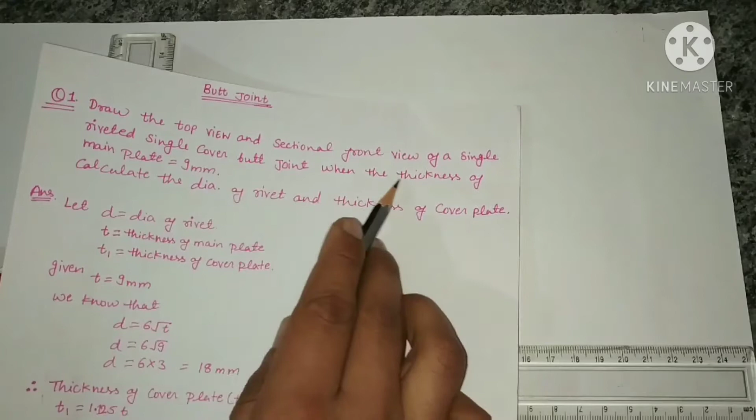This particular drawing is related to butt joint. So we are going to solve the first problem on butt joint and fourth problem in the rivets. The question is: draw the top view and sectional front view of a single riveted single cover butt joint when the thickness of the main plate is 9 mm. Calculate the diameter of the rivet and thickness of the cover plate.

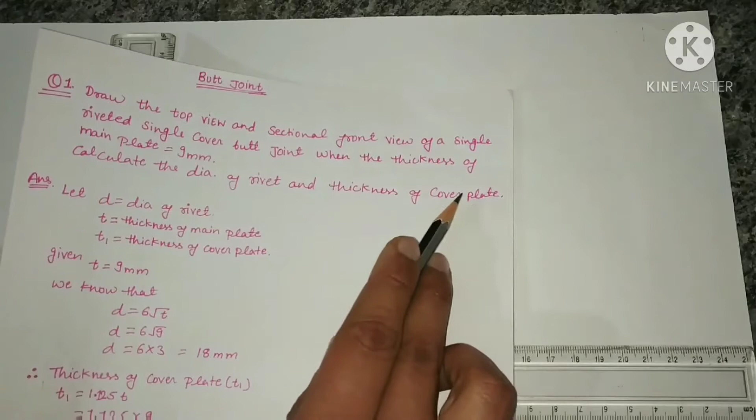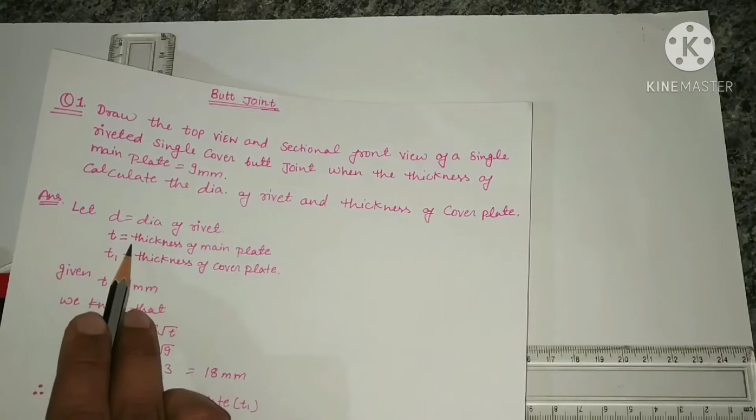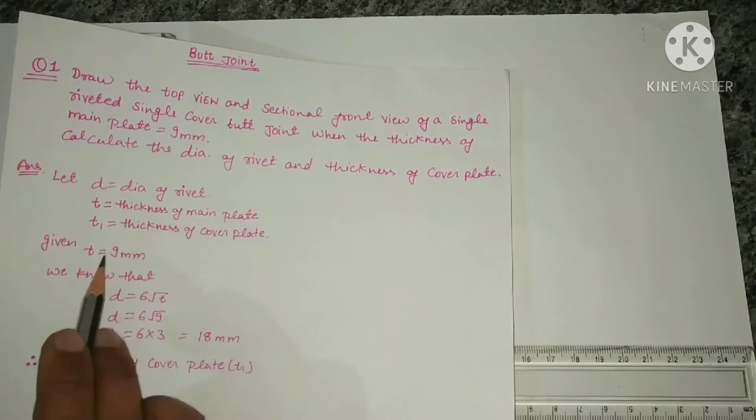So here thickness of the main plate is given as 9 mm. We have to calculate the diameter of the rivet as well as thickness of the cover plate. So let us consider D is equal to diameter of the rivet, t is the thickness of the main plate and t1 is the thickness of the cover plate. Given value is thickness of the main plate, that is small t, given as 9 mm.

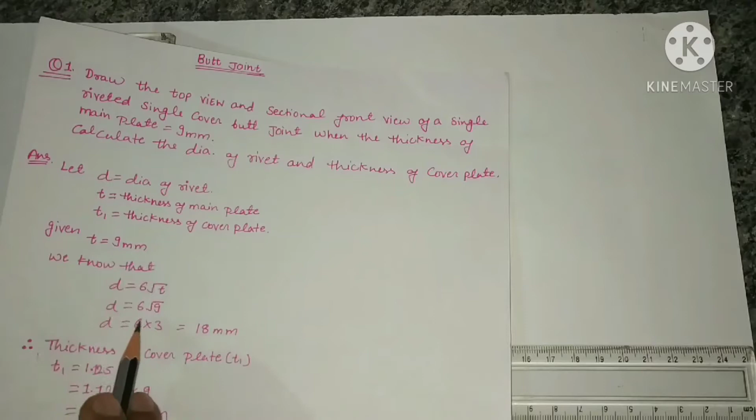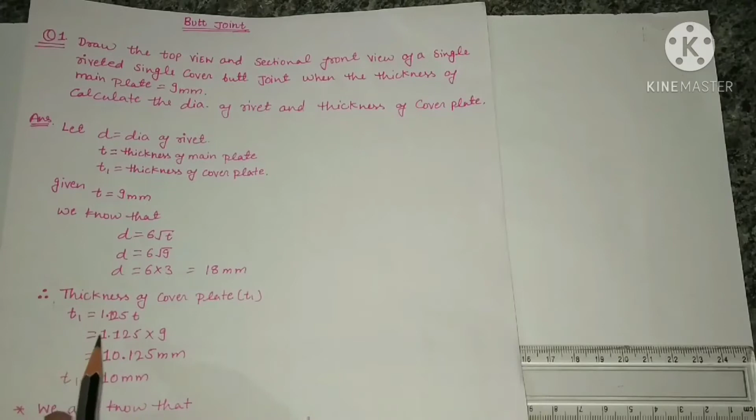Now from the formula D is equal to 6 root t, substitute the value of t as 9. Then root 9 is 3, 6 3s are 18. So diameter of the rivet is 18 mm. Now next step is to calculate the thickness of the cover plate. t1, the thickness of the cover plate, is equal to 1.125 into thickness of the main plate. So 1.125 into 9 mm. It will give you the value of 10.125 mm. You can round it off to 10 mm.

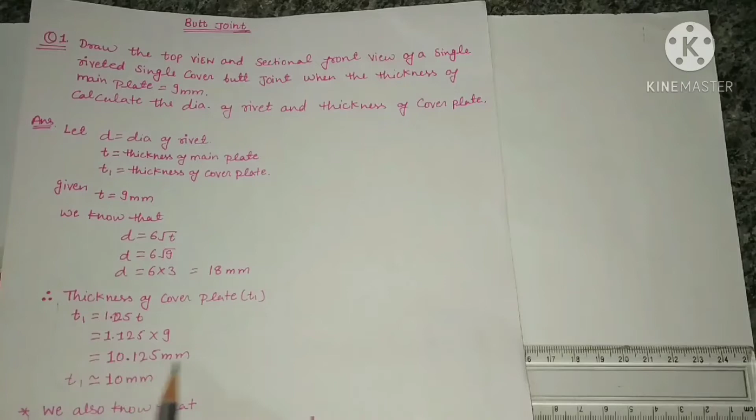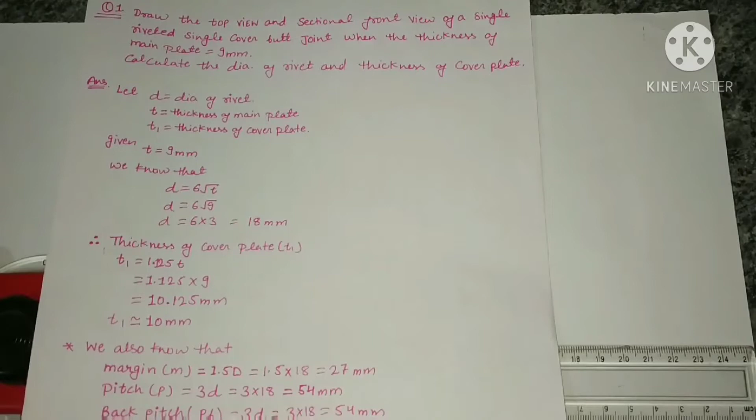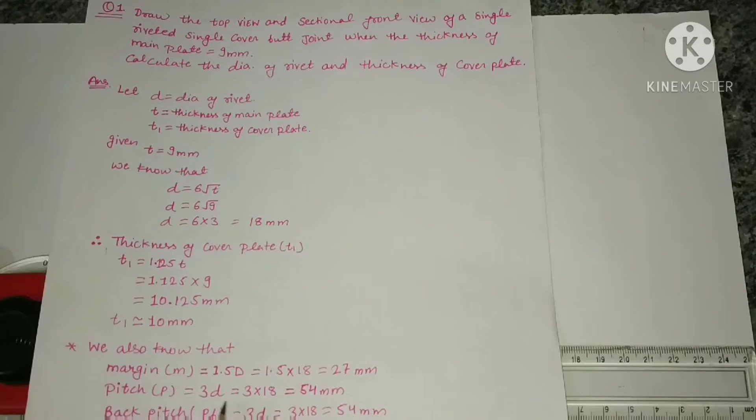Also we know the formula for calculating margin. Margin is nothing but the distance between the center of the rivet to the end of the plate, that is to the slant end. Margin is calculated by 1.5 times of diameter. So 1.5 into rivet diameter 18 gives margin around 27 mm. Now calculate the pitch value, that is 3D. 3 times of diameter is equal to 54 mm. Also calculate the back pitch. Back pitch is calculated by 3 times of diameter. Again it will be equal to 54 mm because diameter is 18 mm.

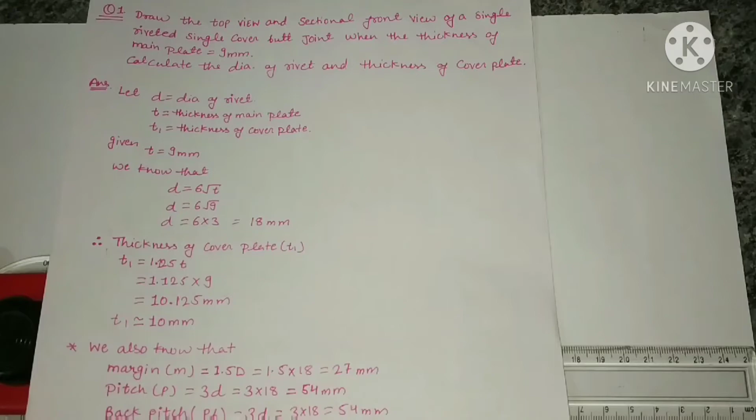You are going to keep the plates side by side and place the cover plate. If you are having one cover plate, place it on the top. If you are having two cover plates, one cover plate on the top and one on the bottom of the main plates. And you are going to apply the rivets. Here single riveted butt joint means you should have one rivet for each main plate. So for a single riveted butt joint, you have to consider two rivets. You are going to join two plates in the form of butt joint by using a single cover plate. So let us see how to draw this.

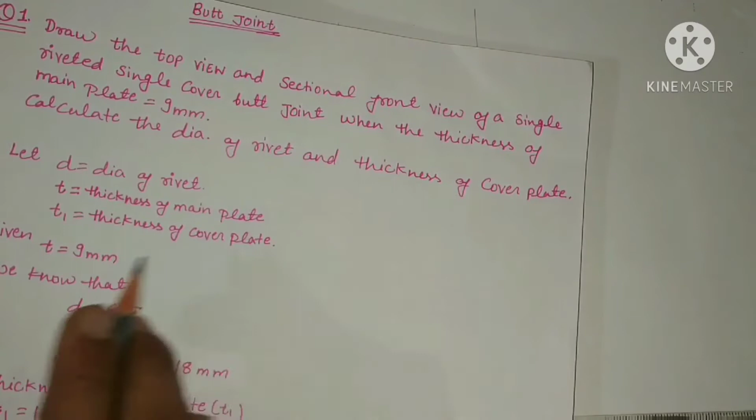As similar to the previous cases, draw the center vertical dash line or chain line. Now we know that it is a butt joint, so obviously we are going to draw two rivets. Even though it is a single cover plate butt joint, to create that butt joint you need two rivets. So we are considering two rivets. First of all, consider the diameter of the rivet, thickness of the main plate and thickness of the cover plate to construct the front view.

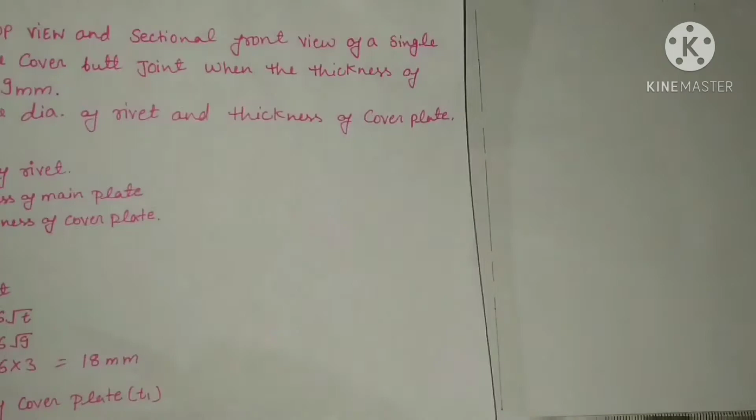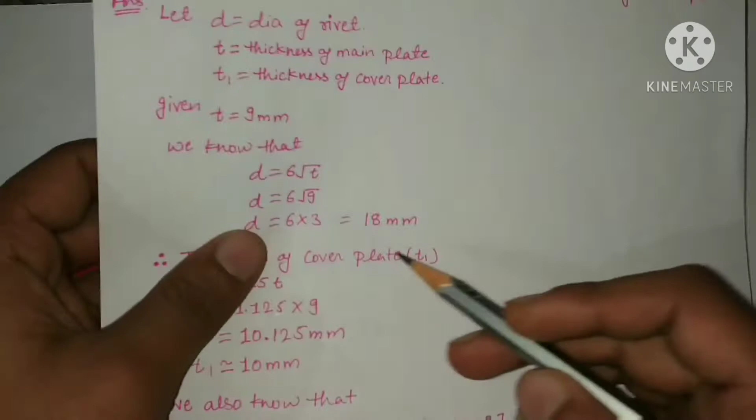As a first step, construct the body or shank of the rivet. We know the diameter of the rivet, that is 18 mm, 1.8 centimeter. Considering this value, draw the body of the rivet. Here length of the rivet will be around 19 mm because thickness of the main plate is 9 plus thickness of the cover plate is 10. So the length of the rivet body is 19 mm and diameter is 18 mm. So 19 cross 18, you have to construct the rectangle by considering a center vertical line. This will give you the body of the rivet.

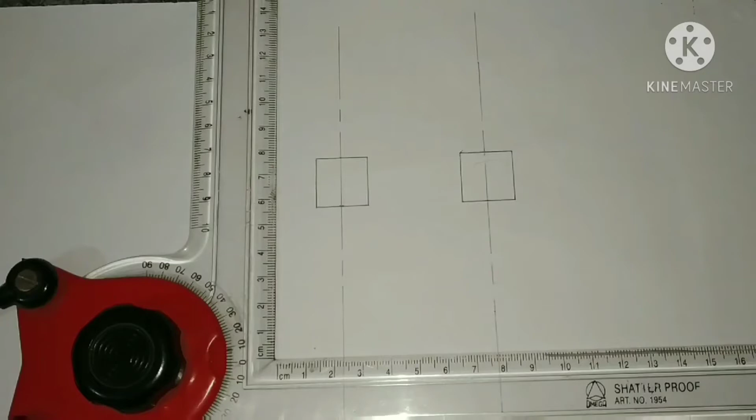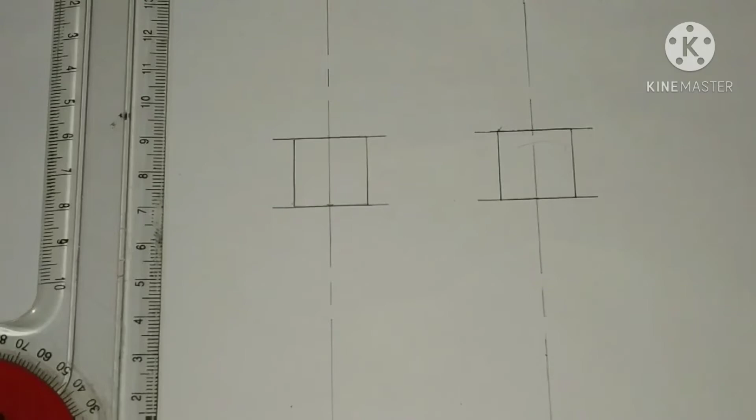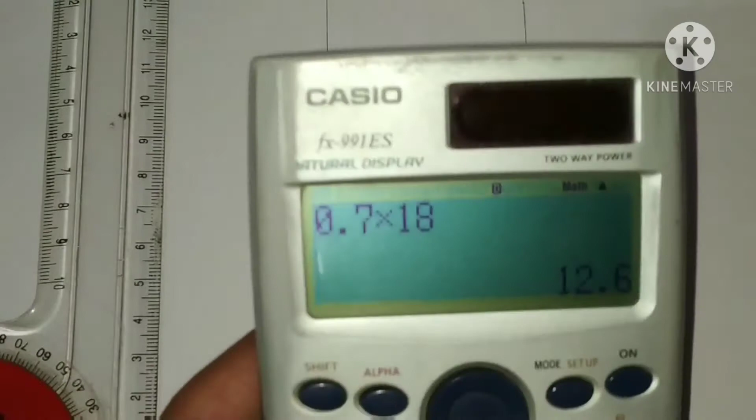After completing the body of the rivet, the next step is to draw the head of the rivet. To draw the head, you have to consider 1.6 times of diameter. 1.6 into 18 is 29, and 0.7 into diameter, that is 13 mm. So by using these two, draw a rectangle on top of the body of the rivet. Then by considering a point on the vertical line, you can draw the semicircle which will give you the head part of the rivet.

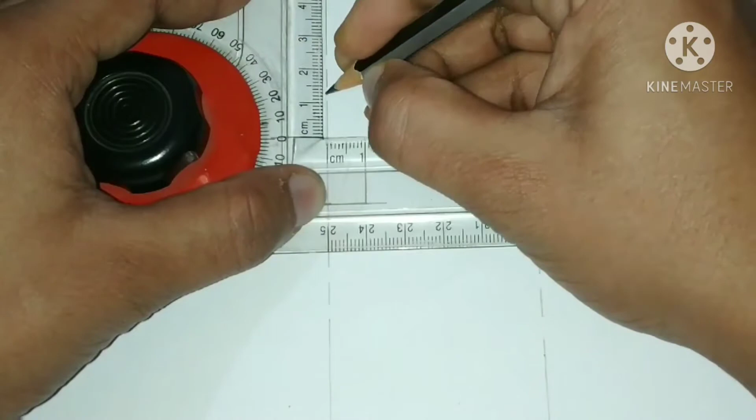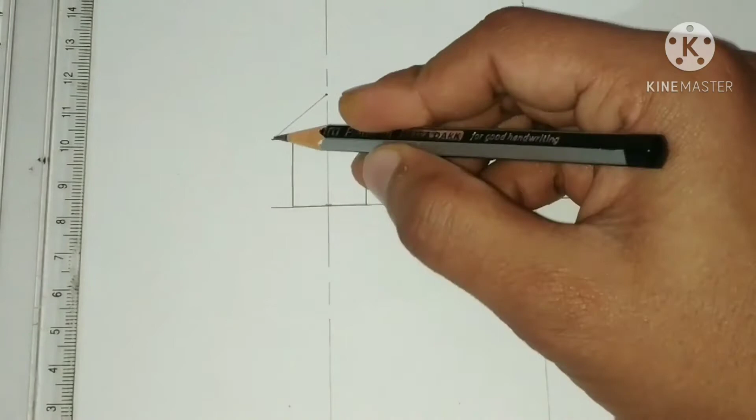Or else the second method is to consider the width, that is 1.6 times of diameter. Draw a line which represents the width of the rectangle. Considering this as base, using arc method, draw the head of the rivet. Same thing has to be applied for both the rivets. Draw the rivet heads on both the sides.

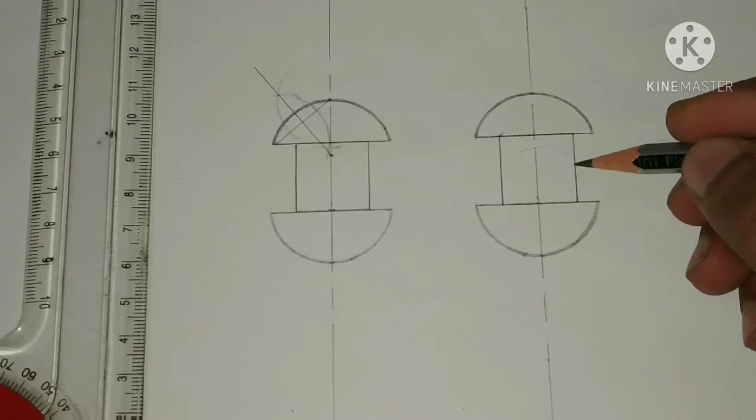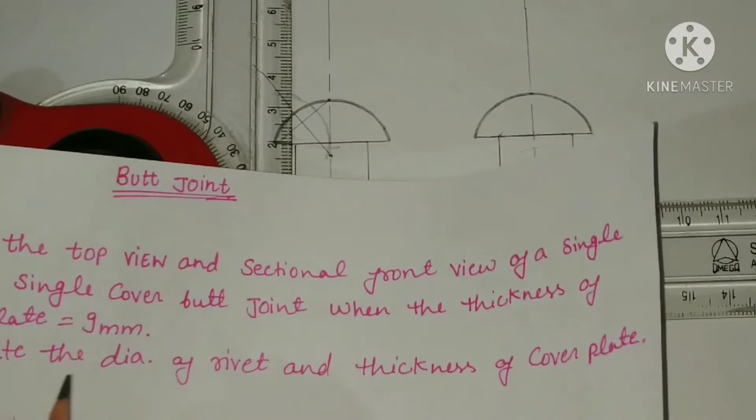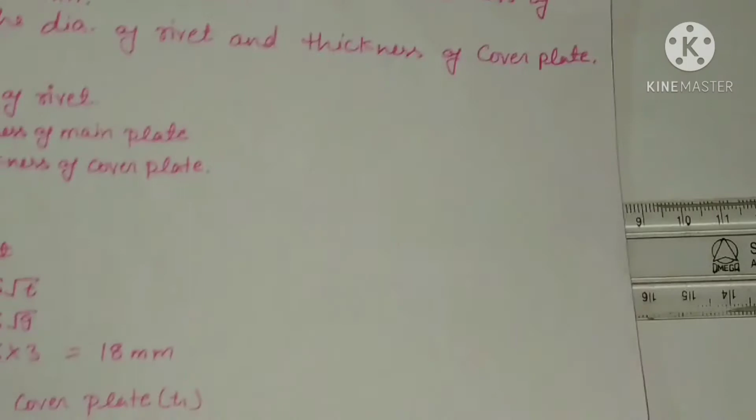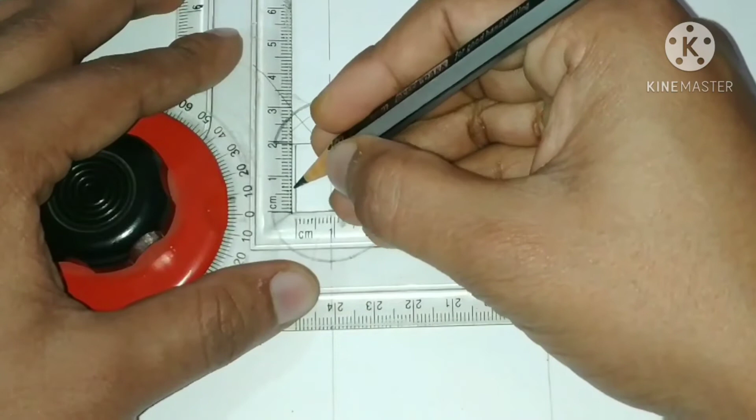After completing the rivet heads, now we have to draw the main plate and cover plate. We are using cover plates for butt joint because it is not easy to apply the rivets or to join the plates to form the butt joint just by using main plates. We are using only one cover plate, that's why we are considering the thickness as t1. Now consider the thickness of the main plate as 9 mm, which is the given value, and the cover plate thickness as 10 mm from the calculation.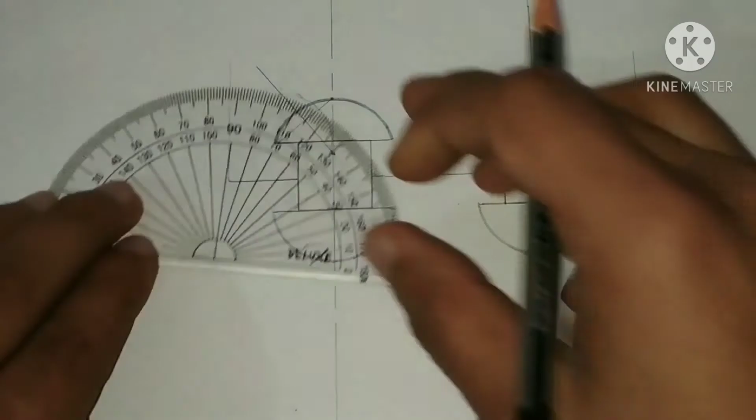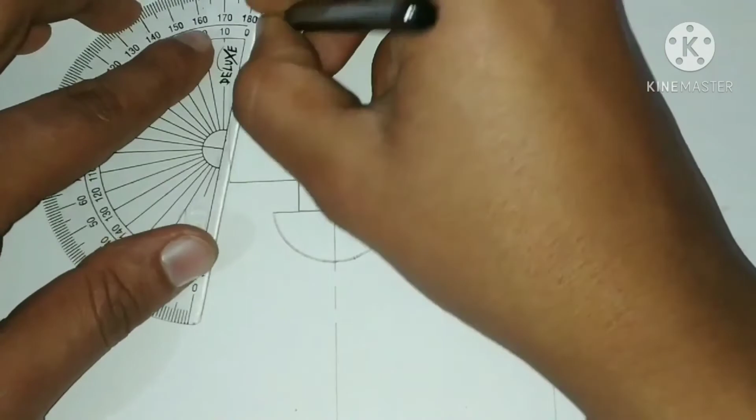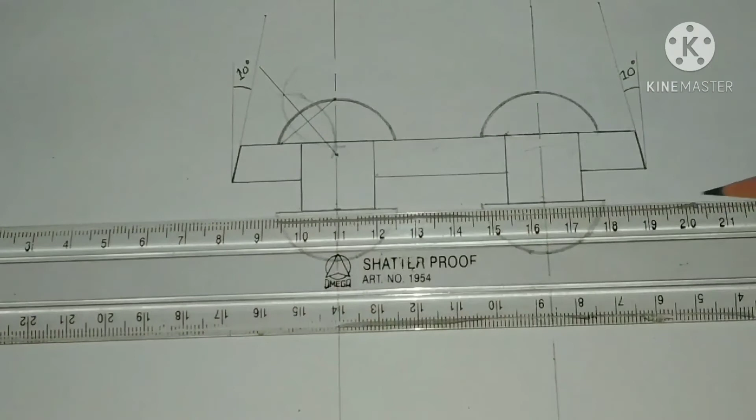There is one more small difference when it comes to cover plate edges and main plate edges. Here you have to consider both the edges of the cover plate as a slant edge, and the main plate has to be drawn with the help of a spontaneous curve. The edges of the main plates, both plate 1 and plate 2, have to be drawn with the help of a spontaneous curve. Cover plate edges should be slant edges by considering a 10-degree taper value. You can observe the figure.

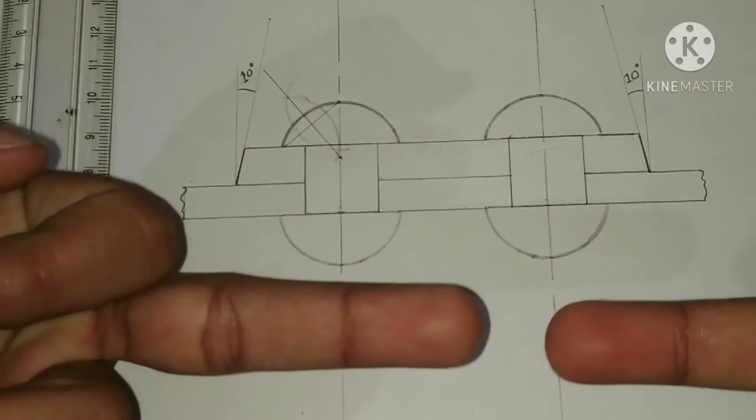We are joining two plates with the help of a butt joint. So obviously the second plate, the bottom plate, has to be divided into two parts. To differentiate that, you can draw a thin line between these plates, or a thin line on the main plates to differentiate plate 1 and plate 2. Now see how I am going to draw the line on the main plate.

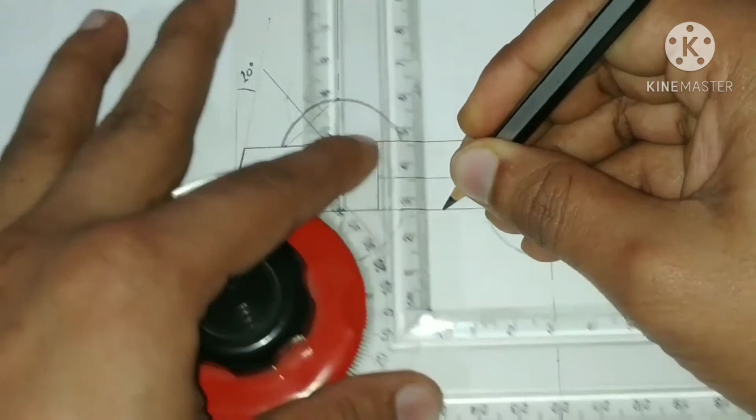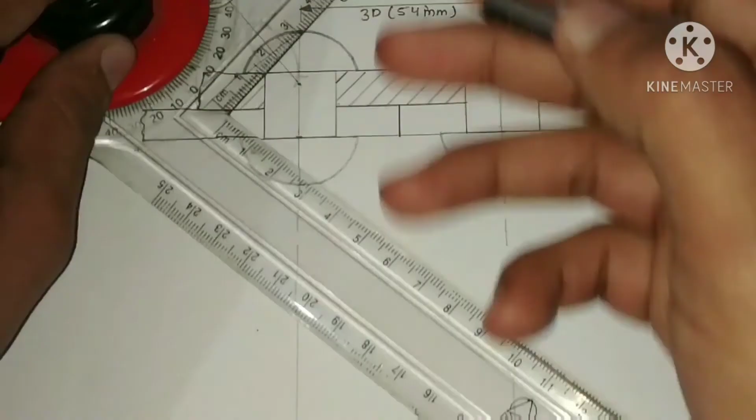After dividing the main plate into two parts, that is basically you are joining two plates with rivets. Mark the dimensions, that is your back pitch value, 3 times the diameter, is 54 mm. Then taper; you have to mark the thickness of the main plate, thickness of the cover plate, everything has to be marked on the sheet.

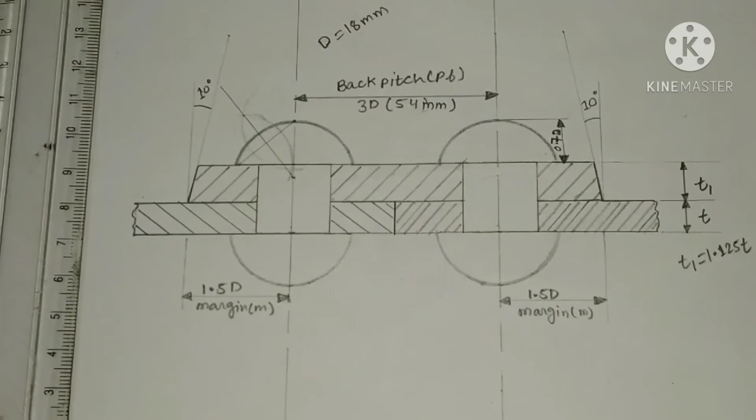This completes the front view of the rivet. When you observe the rivet from the front side, it looks like this. Now the next step is to draw the top view of the rivets. To draw the top view, project the lines from the edges of the plates and from the edge of the rivet head. It will simplify the work of drawing the top view.

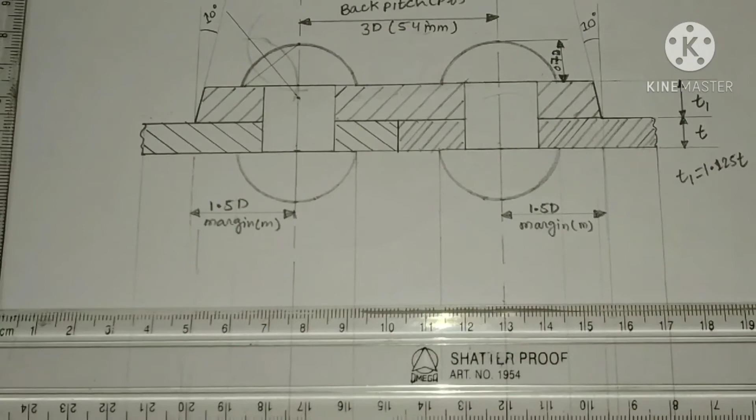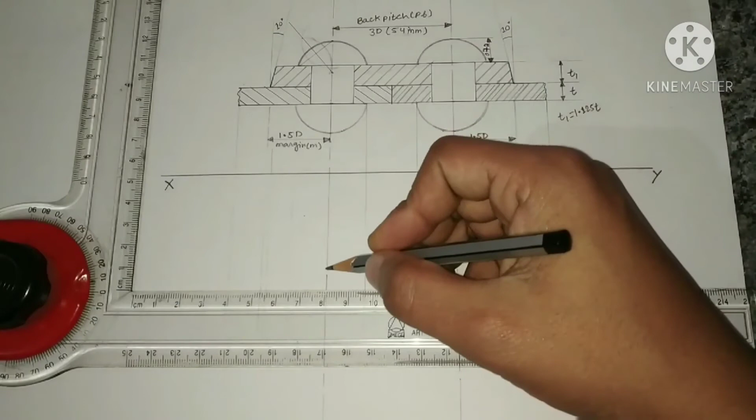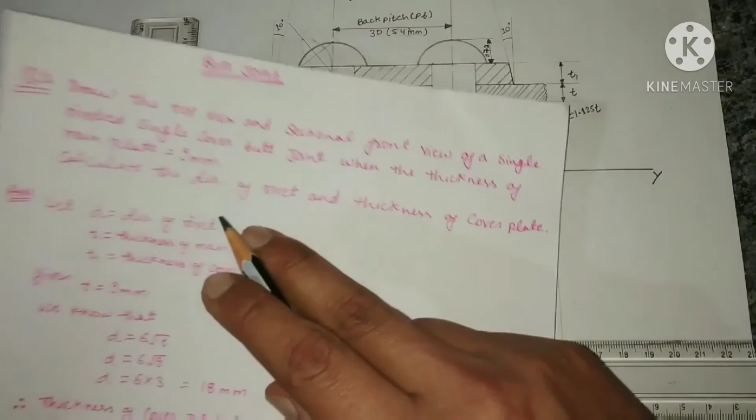To differentiate front view and top view, just draw an XY line, a horizontal line, and mark the edges with X and Y. Now below this XY line, construct the top view. Top view is nothing but when you observe the rivet from the top side, it looks like a circle. But only the head part is visible. That head part is shown with a thick circle, whereas the body of the rivet will be merged inside the plate, so it is not visible. Use hidden or dashed lines to represent the body of the rivet in the form of circles.

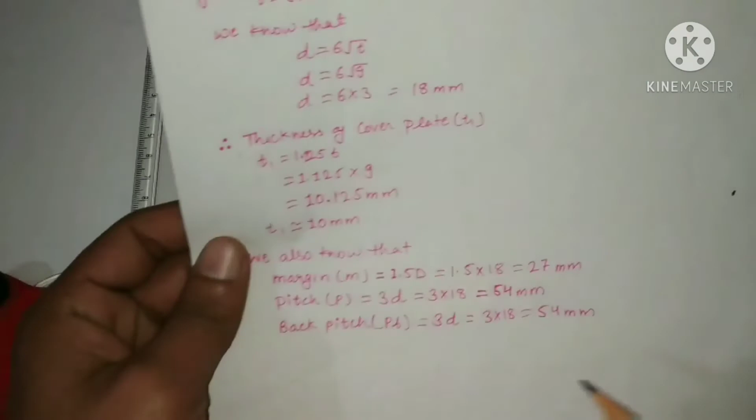It is not mentioned whether it is a chain type or zigzag type. So if it is not mentioned, you can always go for chain type, which is easy. Now consider your back pitch value. Again, the value of back pitch is equal to 3 times the diameter, that is 3 into 18. Use this value to construct the top view. Here back pitch refers to the distance between the centers of the two circles in the top view.

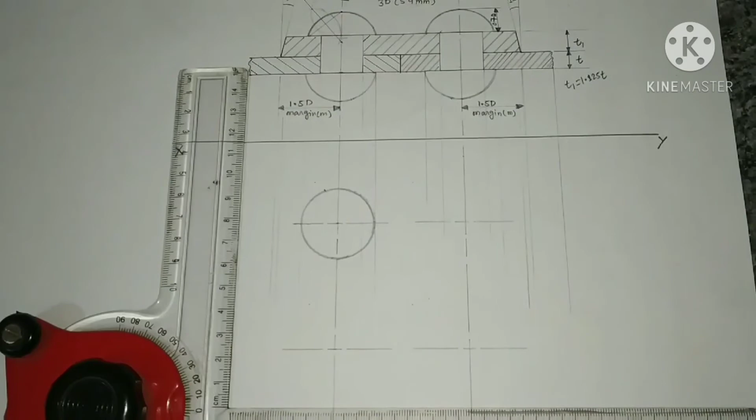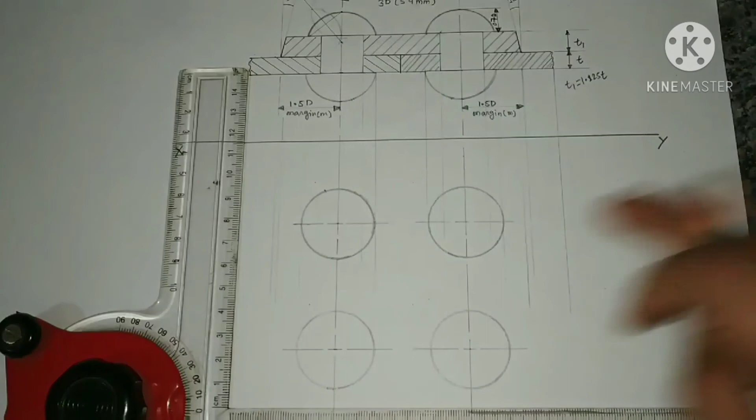Complete the construction of the circles or the top view, and then project the edges of the plates from the front view, and join those edges. If it is a slant edge, use thin lines, and if that edge is covered, use dashed lines to show that it is a hidden part.

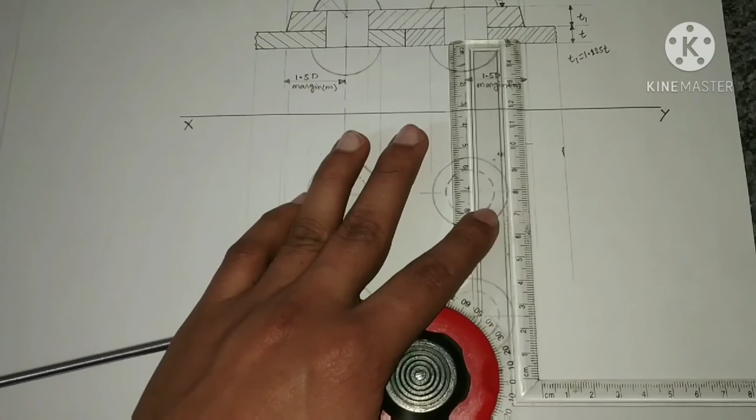Then for the main plates, you can use a spontaneous curve, because we don't know the length of the main plate. It can be an infinite length, it can be 10 centimeters or 80 centimeters. So to represent this, you just draw the edge of the main plate with a spontaneous curve or just a random curve. Complete this top view by connecting the plates, then mark the dimensions on the top view as well. So this completes the 4 problems on rivets.

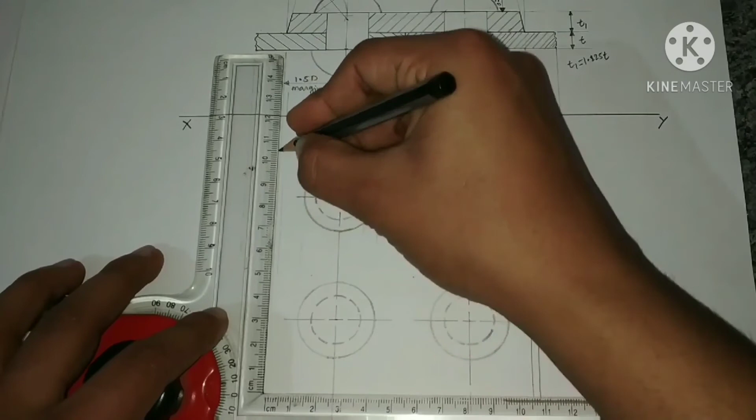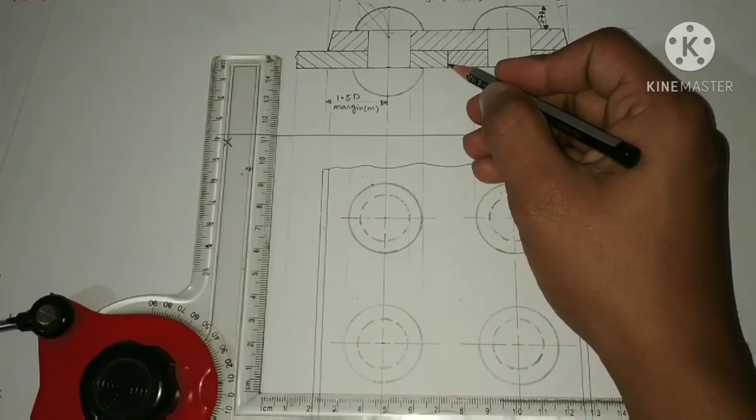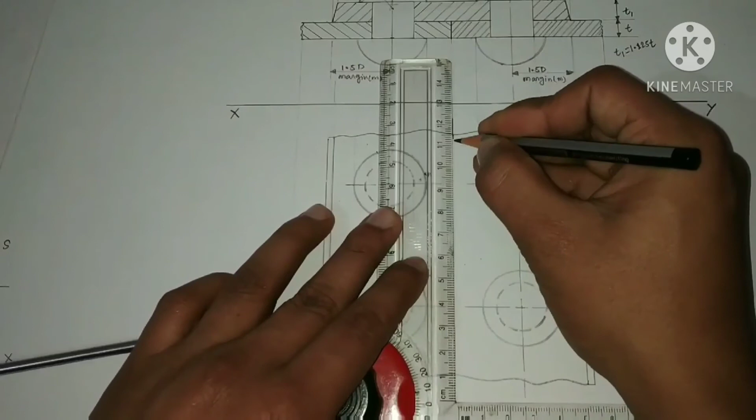Basically, we started the rivet topic with an introduction. Then we solved 4 problems or drawings on rivets. The first one is the single riveted lap joint, where you join 2 metallic plates with the help of a single rivet. Then the second problem, double riveted lap joint. You have 2 main plates and use 2 rivets in the form of a chain. The third problem is similar to the second type. Again, it is a double riveted lap joint but in a zigzag manner. The difference is in the top view: instead of drawing the circles on both vertical lines, draw them in a Z shape or zigzag form. That is a double riveted lap joint, zigzag type.

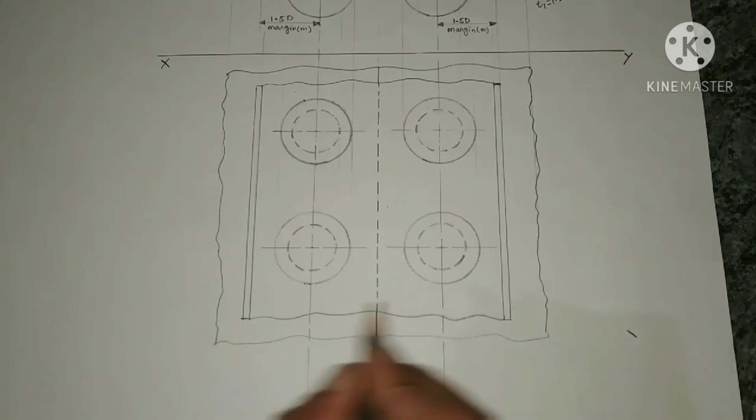Now in this particular problem, we have seen how to connect 2 plates in the form of a butt joint. When you construct a butt joint, you have to make use of a cover plate. Without a cover plate, it is impossible to construct a butt joint with rivets. So we are using a single cover plate, but this cover plate has to be connected to both main plates. That's why we are using 2 rivets. This problem can be stated as a single riveted butt joint with a single cover plate.

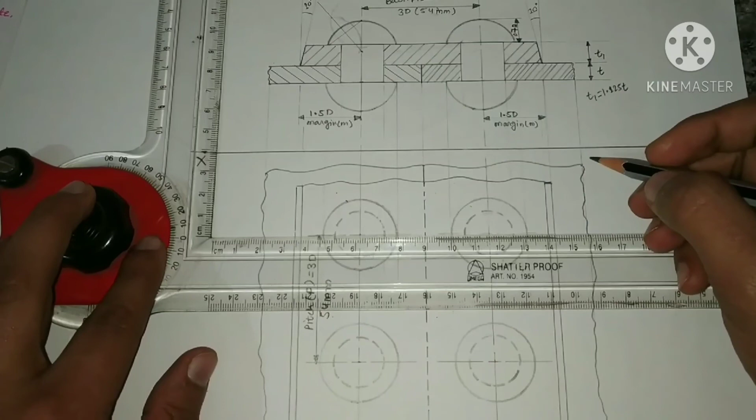The homework problem, I am going to post in the chat box. It is a double riveted butt joint. You have to use 4 rivets there: single cover plate, 4 rivets. So this completes the topic called rivets. As I said in the introduction class, you can refer to the textbook Machine Drawing by N.D. Bhatt, page numbers 209 to 214 for the rivet topic.